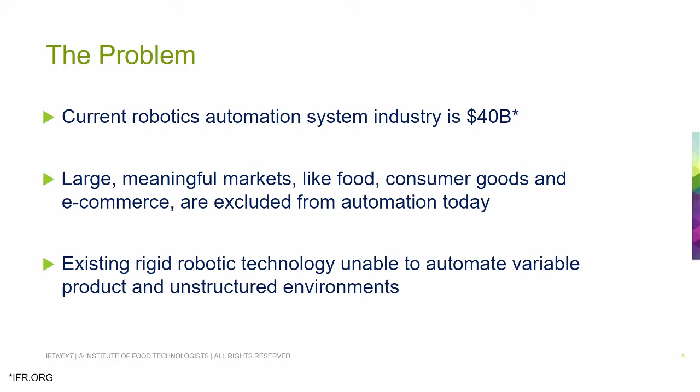What we'll talk about now are the markets that we're looking to address in terms of solutions that have never been available before. Food is really the big one. Food is a market that, as this whole show and conference is built around, is not going away. It's not subject to the ebbs and flows of the automotive market or the computer and semiconductor market and such. It's here to stay.

The unique problem with food from a robotic standpoint is that there are no two apples that are the same. There are very delicate products like eggs and bakery items. There are products that we need on a daily basis in very high volume that are just not conforming to the way that we like to handle things with robotics.

Advanced manufacturing deals with things like consumer packaged goods, things that are irregular shapes. If you think about shampoo bottles and soaps and detergents, there's any number of shapes of those things on the shelves in the stores, and those go largely on customer preference or customer useful life. So by definition, they're going to be as varied as the products themselves.

And then in the area of e-commerce, we've seen just an explosion in the past 3 years, and the adoption by the large e-commerce companies and the need to handle more things autonomously, more things automatically. We talk about farm to fork, and certainly e-commerce is going to have a place to be in that entire continuum.

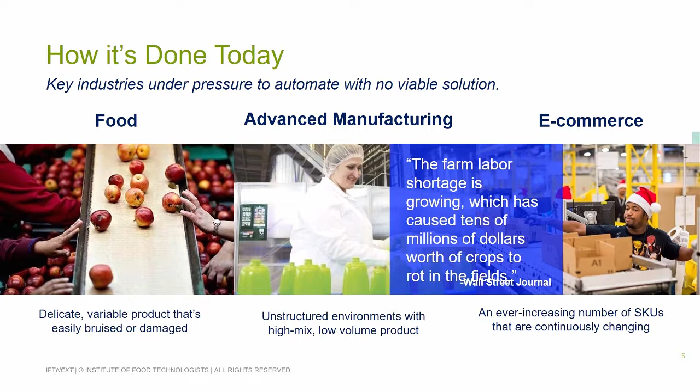So today it's done with people. There is really no more adaptable, no better solution for handling these products today than a person is. And I'm not up here to say that robots are a better way to do it. I am up here to say, though, that robots are addressing a need that we're going to define here, that we've unfortunately run out of ways to handle with people.

As produce, and we'll specifically focus on the food market for a few minutes. The data that we have for the produce industry, looking at the trends back for the past 5 years, shows this 5% annual dollar growth in consumption. And this is a very interesting number in itself. It parallels population growth and other things it correlates to as well.

But if we look at where it's coming from, the 6 of the top fastest growing categories are what's interesting. Value-added vegetables means assortments, mixes, things that don't occur naturally in nature, with the fruits, the cooking greens, especially fruits and fresh produce. This is not even considering things like meal kitting and those types of things that are further enhancement of the variety that we see in food.

So we know that produce sales is continuing to rise. We know the need is going to continue to be there. But what we don't have to offset that is enough people to deal with the problem.

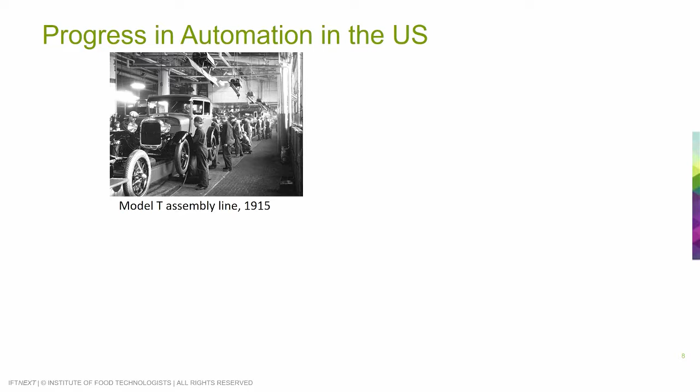If we go back to 1915 and look at Henry Ford's Model T assembly line, we see a modern looking assembly line, a linear assembly line with cars coming down and people doing the installation of the various components on that car. If we fast forward to this year and look at the Tesla Model S assembly line, it's still a linear assembly line by stations where various components are being added at each station. But in this case, it's all being done by robots, it's all being done robotically.

A couple of reasons for that you can think of in the automotive industry. Well, one would be that parts and component subassemblies are heavier than they used to be back in Henry Ford's early days. And the second reason is just that the quality and safety requirements of today's industrial environment are greatly different than they were back in 1915.

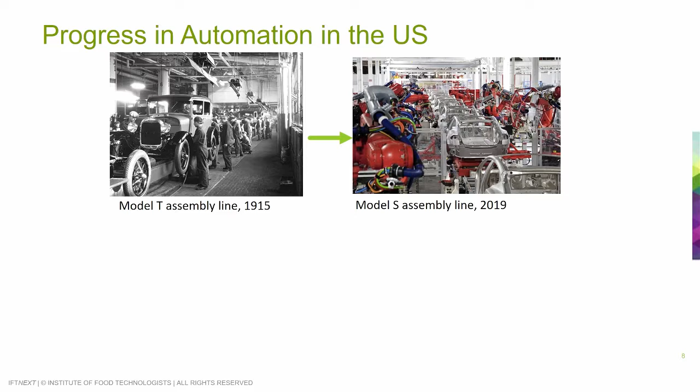So if we look to this model and we project it onto our problem we have with food, strawberry harvesting line at any pick a year, we'll just start with 1915 as we did with Henry Ford, and we fast forward to today. The only difference really is that you see it in color. It's really the same methodology that happens in strawberry harvesting that's happened for decades and decades.

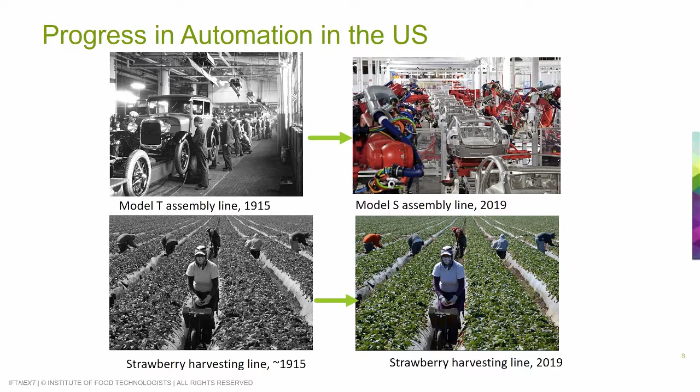So this is a real problem for us that we have real solutions for, and I want to delve into it just a little bit on how we can go about doing that in a few slides.

I want to add a little bit of detail to the food safety question here. Specific to this conference, the questions of traceability and food safety are very common. I've talked to several folks at the conference for whom this is a very important topic.

We can all recall various outbreaks and recalled food, whether from the grocery store or restaurants having to relook at their processes and systems. So we have a problem of contamination. And contamination, as we know, bacteria, has to come from some living organism. In the food handling segment of the supply chain, this comes from people. So in addition to a shortage of labor, we have this very real, very difficult situation where people having to touch produce introduces a potential transmission of bacteria and illness into the food chain.

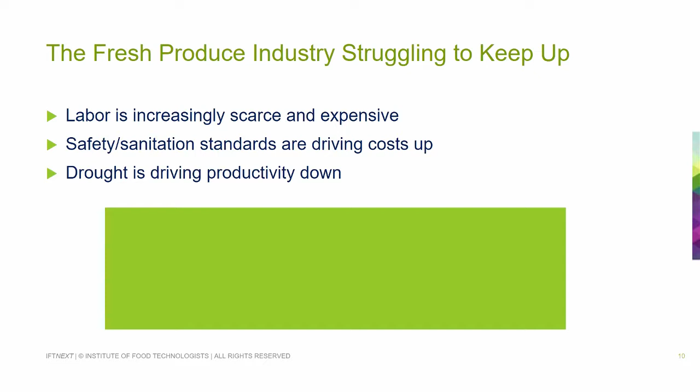And then we have other things that from year to year are very unpredictable, affecting the productivity of the entire supply chain, in ways that we can maybe stabilize or make more effective. These are all worthy of putting into our problem statement.

So we have a solution to that. And in business, we know we've got to have a return on our investment for that to make sense. So I'd like to take the viewpoint that what we're going to do is not something we do just because it's novel or interesting.

Certainly it's fun to sit and watch robots mix drinks at a robotic bar, or watch a robotic lawnmower cut your grass. Those are entertaining, but they don't have the same ROI that something as critical as food production might have. So we've got some very real opportunity in terms of return on capital investment in the food supply industry right before us.

I want to pause for a moment and talk a little bit about the finance part of it. In our industry, and what I deal with on a weekly basis, is a shift in thinking and investment for companies who produce food.

The cost of manufacturing tends to have been not in the capital goods, but rather in the cost of production, the hourly wages of workers, and these variable expenses that can be floated with seasons and adjusted by adding or taking away workers themselves.

These variable costs that are up front are going to have to change to fixed capital costs in robotics and other automation and machinery. So there's a transition in thinking that has to happen in the finance office of the food companies. But when we can explain the ongoing benefits, the return on investment, and the improvement in the overall supply chain, we tend to be very successful in arguing the case for the robots.

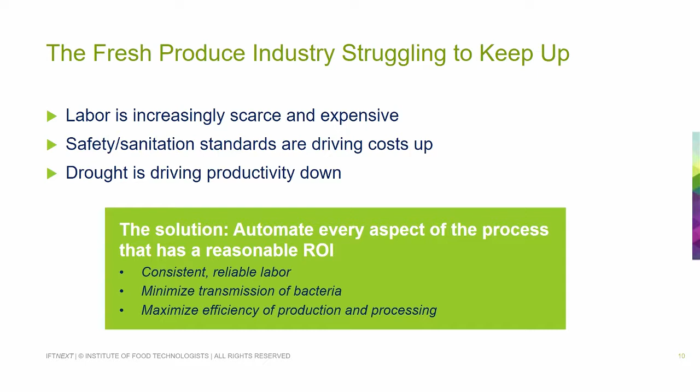So what is it going to look like if we do this? Well, we've already seen a trend from 2017 to 2018 of 48% growth in the use of robotics in the food and consumer goods space. I'll show you on the next slide that some of this is in the more traditional areas where we're trying to replace heavy operations or repetitive tasks with robotics, and that's very good. It helps drive adoption.

But further to that, we're getting more comfortable with robots. If we think about traditional industries, the automotive industry has certainly saturated and plateaued. It's growing at negative 12% from 2017 to 2018, based on the cycles of the automotive industry itself. Not really germane to this conversation, but electric vehicles themselves have put a real dent in traditional automotive manufacturing methodologies, and it's showing up in robot production.

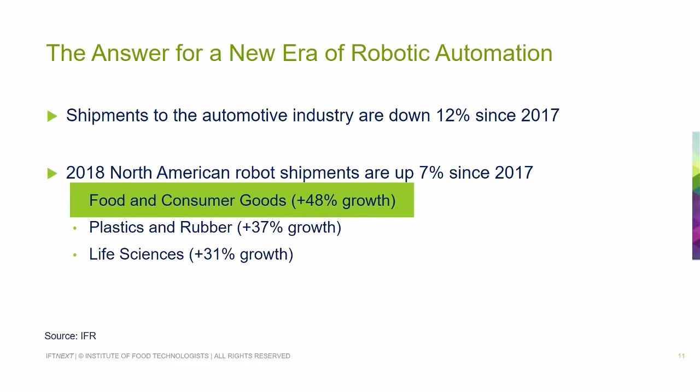Rubber and plastics, life sciences - those are all growth industries as well that are not traditional uses of robotics. We've seen very good success in penetrating some of those new spaces as well.

As I talk to folks about robot systems and costs, one of the examples I use is the computer industry, sort of the Moore's Law approach, where robotic systems costs year on year have gone down, whether you look at it as an overall system investment in gross dollars, or as automation per operation. In the case of food production, it's typically cost per pick that we talk about. Those costs are going down over time, and they're projected to continue to go down over 20% over the next decade. So this is all very good news.

If we're talking about a financial justification for solving the real problems we have in food production, we have to have something we can look back on and count on. Fortunately for us, the industries of automotive and semiconductor have provided this ramp and have proven to us that we will actually save money on a use case basis over time.

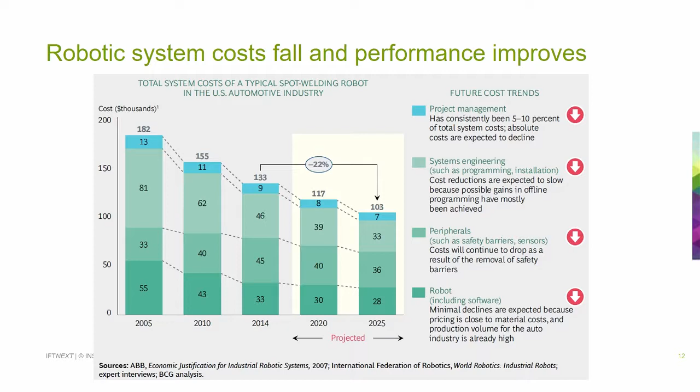So palletizing has been a very good one. The packaging and picking of very repeatable products like cheese or hamburger patties, things that are really the same every time, has become something embraced by the industry as well. If I can package cheese in a cold room and people don't have to do it the same way every day for 40 hours a week, companies are going to see the payback on that, and we're going to get installations that are starting to move that labor into more desirable uses within the organization.

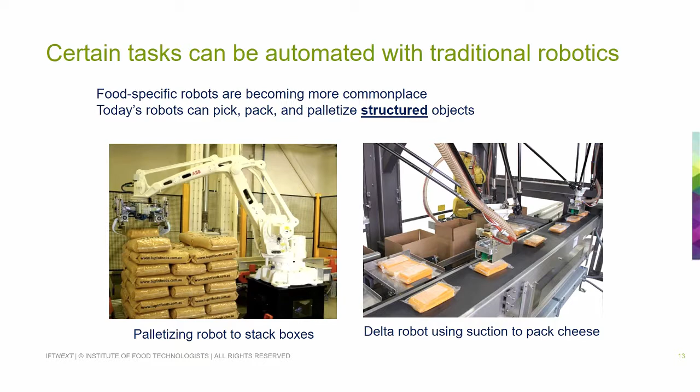The environment we're going to penetrate with robots, in addition to palletizing and high-speed picking of repeatable products, includes things like produce packaging. If you spend any time in the Central Valley during harvest, you'll notice lines of people sorting, sizing, and packaging everything from avocados to pecans to apples. It's a very labor-intensive process that's flexible and adaptable to the size of the harvest, but it's becoming increasingly more difficult to do.

Seafood packaging is another one of these areas. Our feedback has been that people just don't want to do it; if they could do something else, they would. It's very difficult to spend all day in a cold room packaging seafood for very little value added.

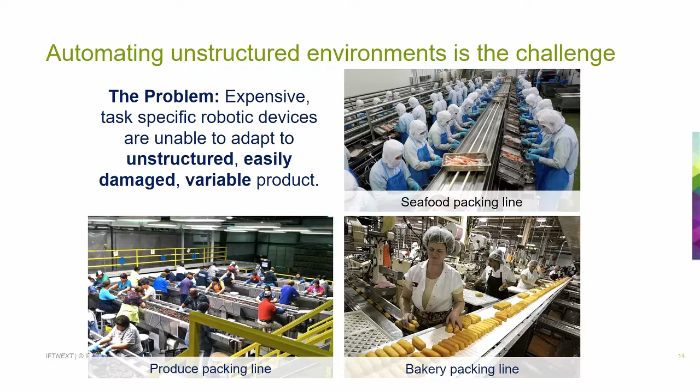Bakery is a very interesting one as well, and you'll see a video coming up shortly that shows bakery has its own set of challenges. Baked goods right out of the oven, or even in raw form, are very delicate, and traditional robotics and methodologies can't pick them up very well. It's a product made to be handled by people, but finding people to do it is very difficult. We've solved that problem in a number of ways.

With that, we'll look at an example of what I'm talking about. This will be very different from a lot of what you've seen at the show, but it's an approach being used out in industry right now.

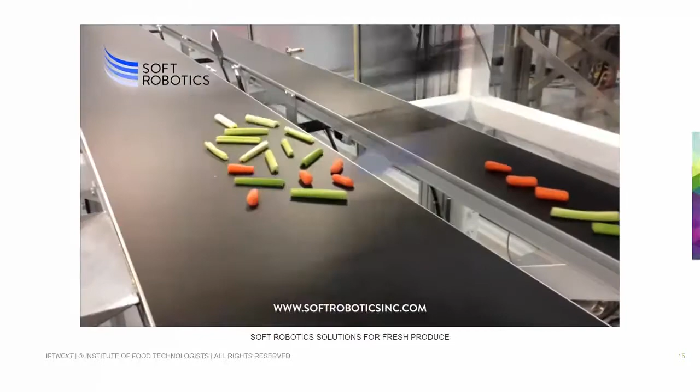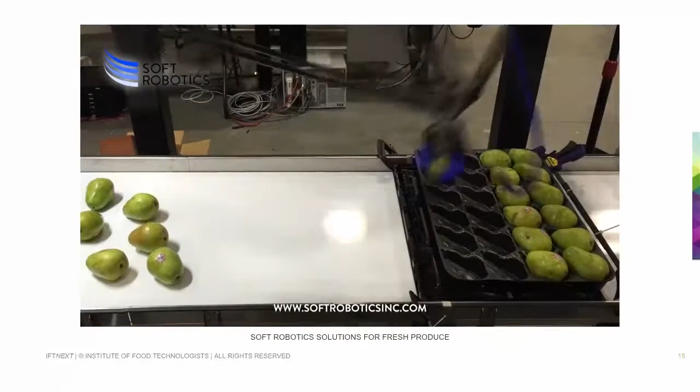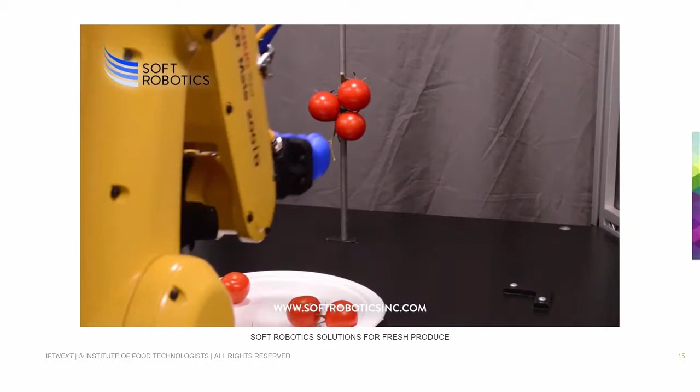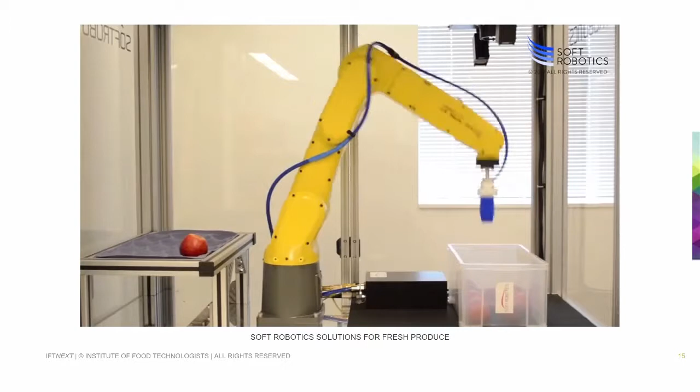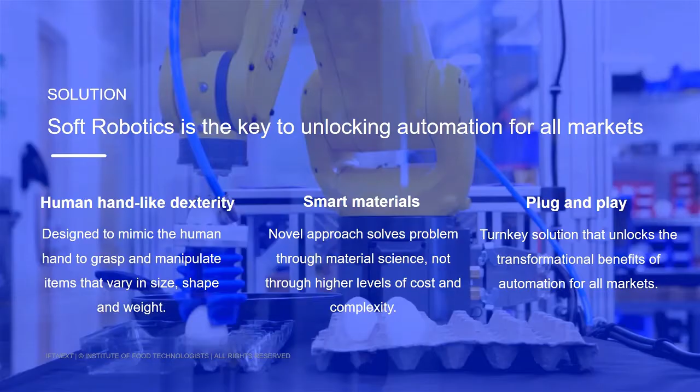Solving these very difficult problems was the very beginning of our company. We were founded to unlock automation technology for all markets, primarily ones not addressed by traditional robotic automation. We have a product that gives us hand-like dexterity, as you saw picking up those fruits and parts, based primarily on material technology rather than deep learning or artificial intelligence programming, although that does have a place in the industry. It's made for an industry not used to using robotic automation, so it needs to be very robust, plug and play, easy to implement, and easy to get a return on investment for.

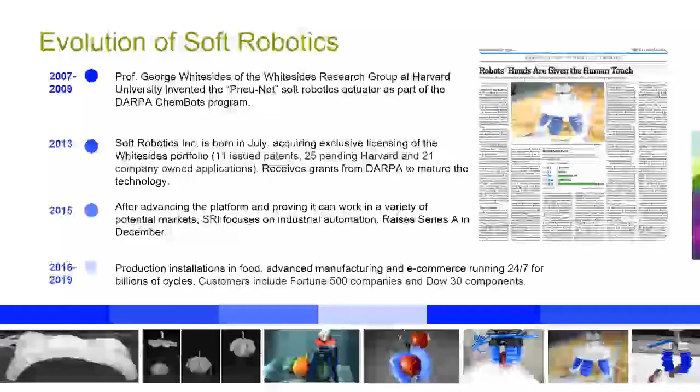If you look at this combination, there was no solution for it out there. Back in the 2007 to 2009 timeframe, the US government through DARPA had a grant out at the Whitesides Institute, from Dr. George Whitesides at Harvard University, to solve a problem for a flexible, adaptable product to be used in military and defense applications. The Whitesides group tackled that and was very successful in producing what was called a ChemBot, a soft, flexible device that behaves in every sense like a robot without being a rigid product.

Fast forward to 2013, the technology was released by DARPA and able to be commercialized, and the company was founded in July of that year as Soft Robotics, Inc., nearly six years ago. It's based on our technical patents, pending patents, and grants to further develop the technology into an industrial and commercial product. Our company is very young, six years old, and the first sales in the market were around 2015.

We began to grab the interest of journals like the Wall Street Journal, and then various trade industries started looking at it and said, this might actually be a real thing. The robot industry itself sort of held back and said, we don't know. This is not what we've done before. So we're going to have to wait and see.

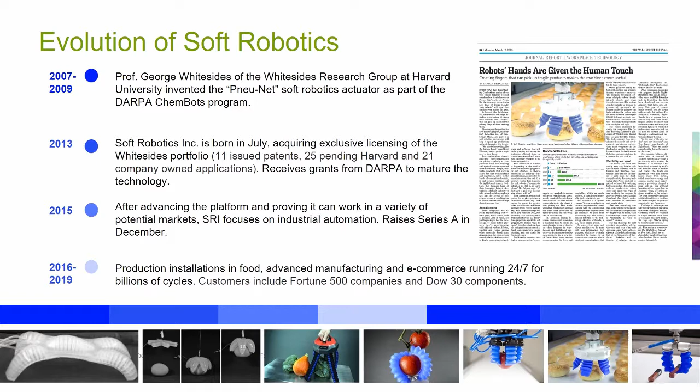Whether it be handling raw pizza dough, or harvesting lettuce from mobile devices, or handling donuts and putting them in mixed packs, or packaging meal kits and doing the like. There's any number of things that your imagination could come up with that could be done in this fashion, and we've been able to address it.

To convey where we are in the adoption of the technology, if you think about automotive technology, anywhere there's an automotive plant in the world, there's going to be a slew of robots in there. It's a very stable market. It's a market that's very accustomed to using robots.

In the food industry and the unstructured environments that soft robotics deals with, we are primarily now installed in the very robot friendly, very forward thinking markets in the world, which include the US, includes Western Europe, and then also includes Asia in the robotic friendly markets there.

So what this tells us is that we've got traction in these markets, and we've seen just in the past, I'd say 9 to 12 months, what we're calling an explosion of sorts out from these robot-centric areas into areas where the plants are, and typically robots haven't been seen for hundreds of miles in some cases.

So the adoption is happening. The acceptance of the technology into the industry is becoming more proven with every million cycles that happens. And when companies, the big food producing companies, start to see their financial payback, then they raise the adoption, and we continue to go on.

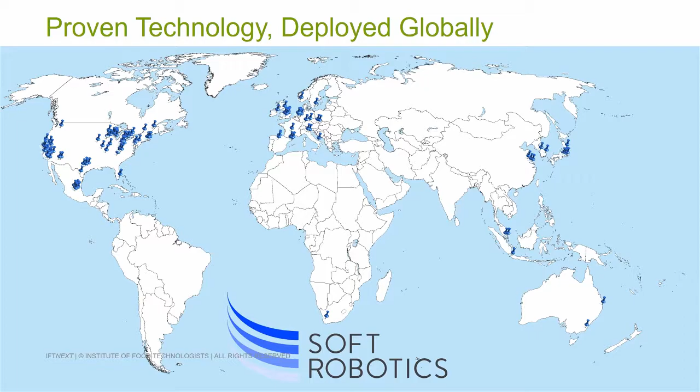So that's where we've come to, where we're being covered now by everybody. Dr. Whitesides actually coined the phrase soft robotics, and I think he owns the trademark itself. But we have our own academic journal surrounding soft robotics.

Our CEO, Carl Vause, is an active member of the World Economic Forum, as we can see that food production and supply chain is an extremely important subject for the World Economic Forum, and he's helping to drive solutions in that way. We've seen various other academic journals and a lot of industry groups show great interest in the technology, and you'll hopefully hear more and more about it going forward and start seeing it in more commonplace areas as we're solving the problem.

I'm going to show a video now that's just going to loop here, and during this video I want to circle back and make sure we talk about the solutions that we're trying to drive for.

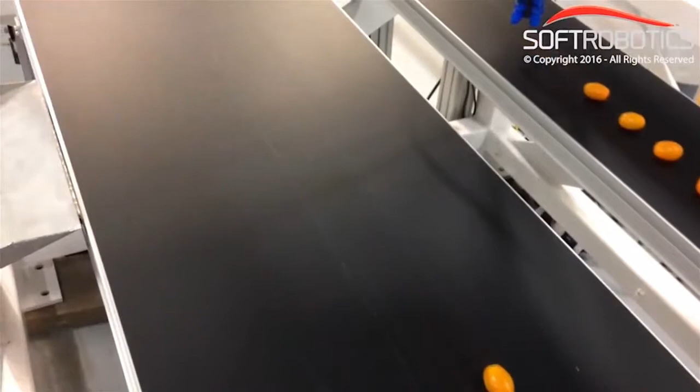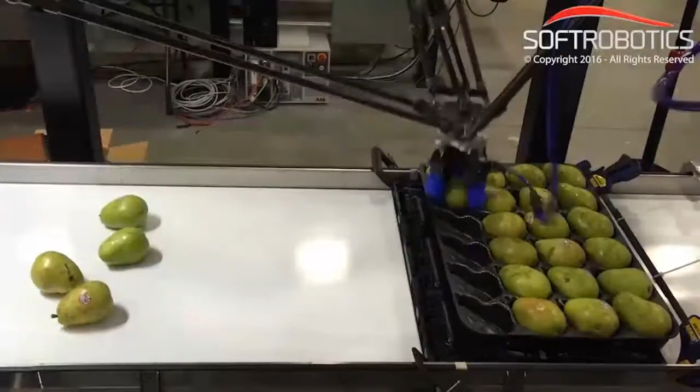We're trying to save crops by providing a method to get those crops or that food from its raw or unfinished state into a packaged state. That's previously been done by people. We have a definite and documented shortage of labor to be able to do that. So now we're showing how we can do it with robots.

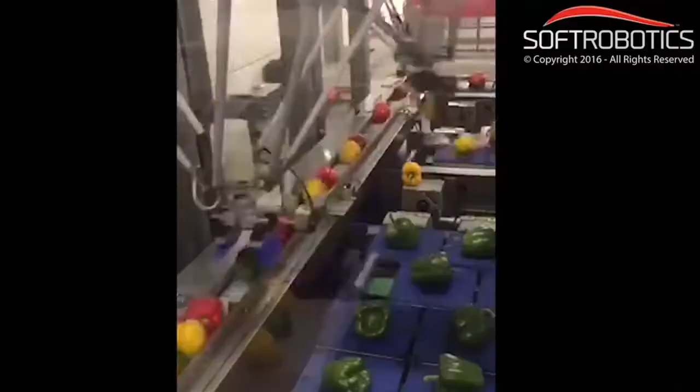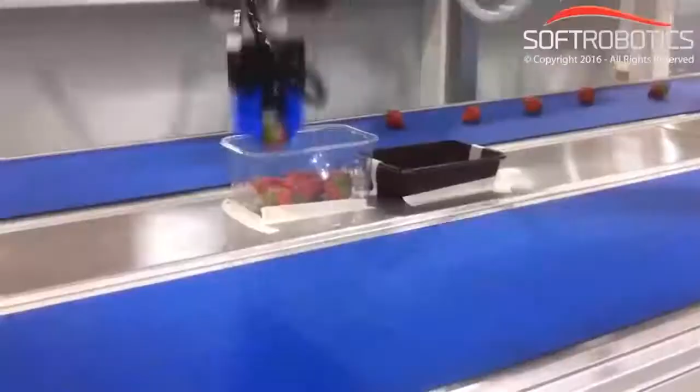Robots, we put a vision system on them. They have full 3D cognition for where parts are, and we can handle things like raw pizza dough. In this video, we can mix various things together, like the stoplight pepper packaging that you see in your grocery stores. We can do proteins, fresh fruits and vegetables, and bakery items all day long.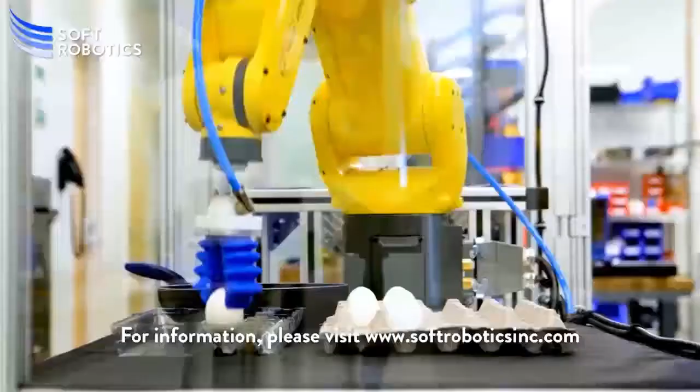If you're familiar with Peeps, the little marshmallow candies that we see, all of the Peeps that have been packaged for the past 2 years have been packaged by our technology.

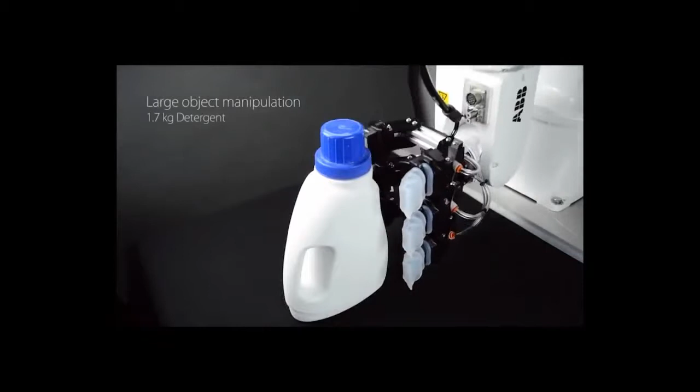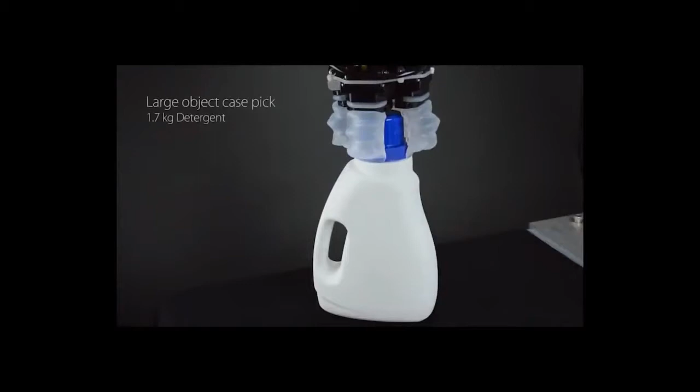So this gives you some idea of how this works. It's not really doing anything different from a robot perspective, but it is doing things that have never been done before from a grasping perspective. That is the enabler that the food industry has lacked to be able to put widespread adoption of robotics into the mainstream for the industry itself.

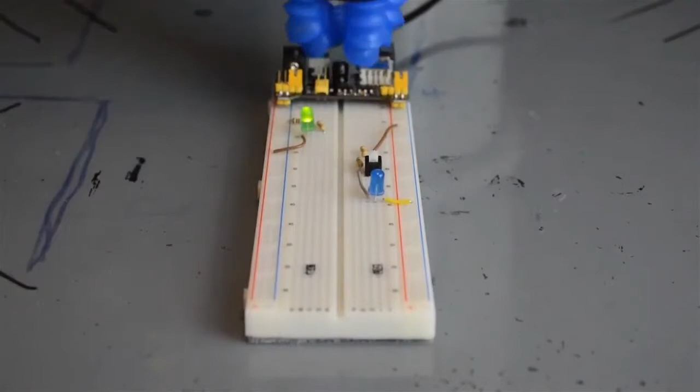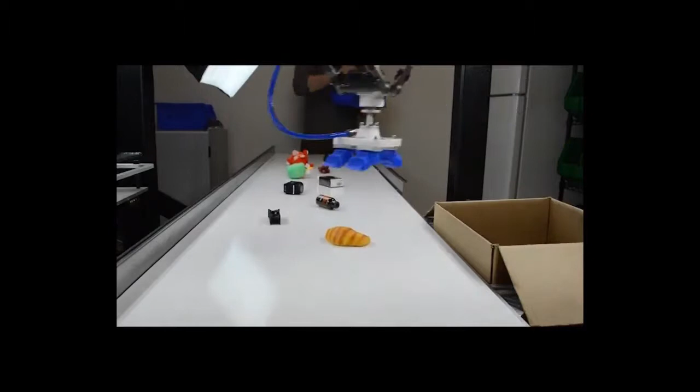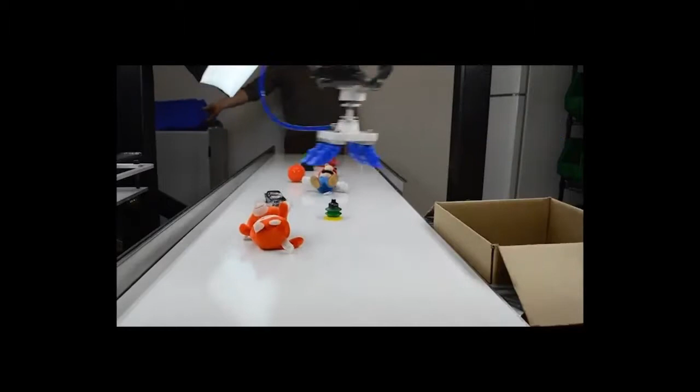So tie it to the quality control aspect too, that a human would give you that this wouldn't. From the human perspective, yes.

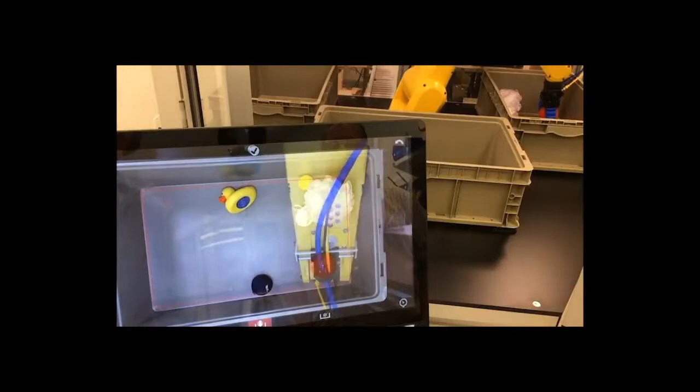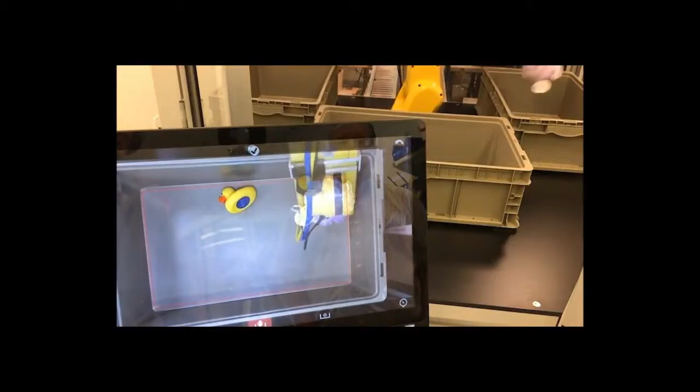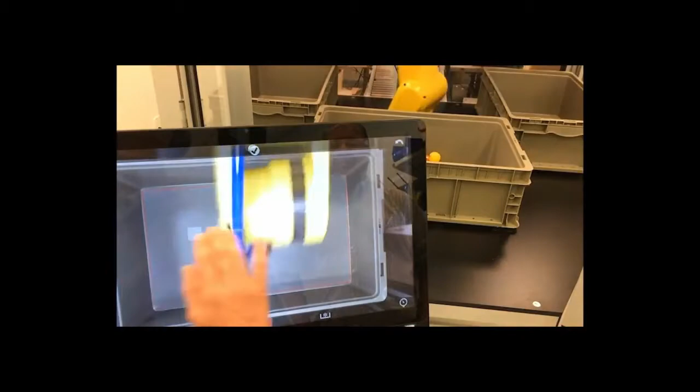So even in something as flexible as soft robotics - great question - because even in something as flexible as we have, you still have to define the part that you're picking up. For example, the same tool that we would use to pick up a watermelon or cantaloupes, we would not be able to use that exact same tool to pick up pecans. The same person could certainly pack one on one day and the other on another day. So no matter what we've done up to this point, we still haven't obtained or gained the flexibility that a human being actually does have.

The other difference is that we have tactile sensation and haptic feedback that we get from our fingers that we haven't built into this simple tool. The tool is set up to grasp at a given grip strength, which the operator would set, and that's what we pick up to. So we can't tell if something slipped out of our grasp, and we can't tell if something is colder than it should be or hotter than it should be, that kind of thing. Those are all certainly possible, but they triple the cost of the investment for automating the same type of thing. So we're not there yet, but we're moving up the curve of replacing a lot of things that people have been doing.

So that's interesting - we would couple that technology. The question was, if the fruit was damaged, well, we know not to pick it up. So what we would use in that case is the input from the vision system that we've defined. I talked to somebody yesterday about apples, and we talked about how to determine if an apple is bruised or not. We can do that with a vision system. But in order to do that, you have to teach the vision system what is a bruised apple, how brown is brown, that kind of thing. We have plenty of technology to do it. The bigger question, just like the size of the product, is defining it for the system itself.